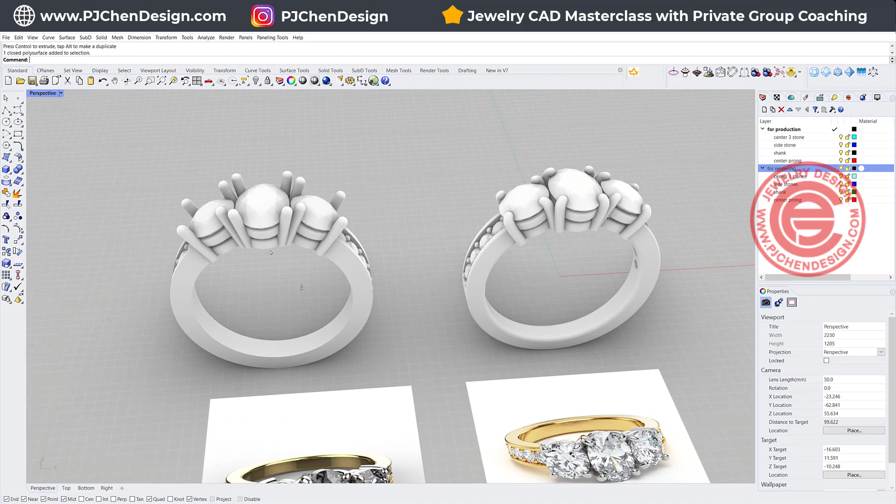I'm very excited to collaborate with another YouTuber, Will Gibbons. His channel is all about Keyshot rendering. So in this tutorial, I'm going to talk about how to prepare a jewelry for the production compared to the jewelry for rendering like the one on the right. If you go through my Keyshot rendering playlist, you can easily create a rendering something like that.

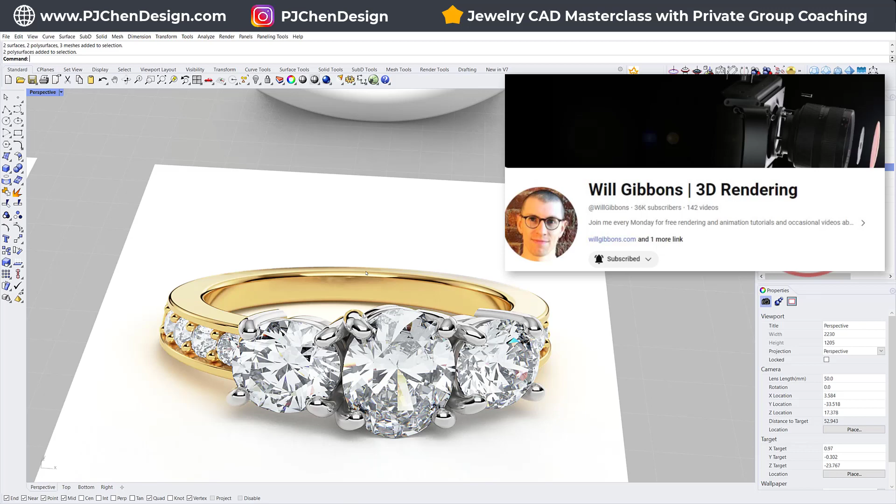But on part 2 of the video, Will is going to talk about how to create a stunning rendering like this one with a lot of Keyshot rendering tips to make the stone brighter and also correct color on your gold, starting from scratch.

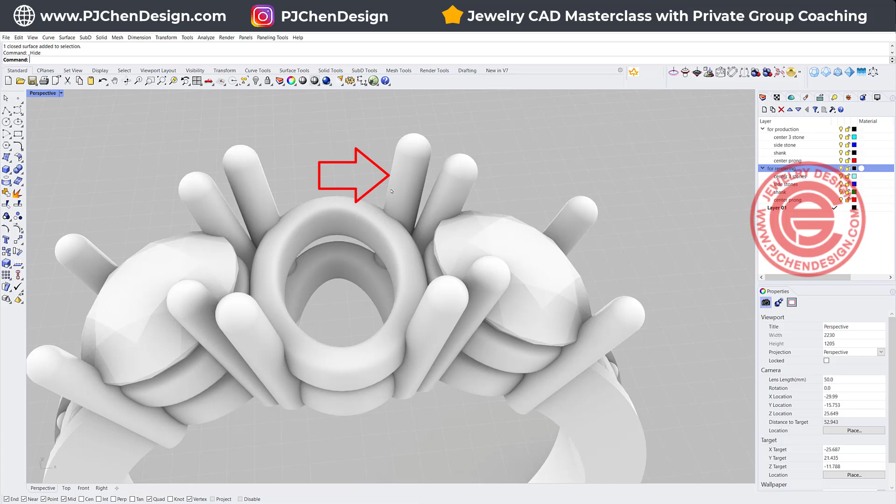As you can see, the ring on the left is more for production. The reason we are making this look like a porcupine is because we need to have it longer, so the jeweler will be able to bend the prong over. Another thing, we don't want to pre-cut the prong, because we want the jeweler able to cut and polish at the same time, and then when you set the stone, it won't be dark on those four corners. Right? So that is a big difference.

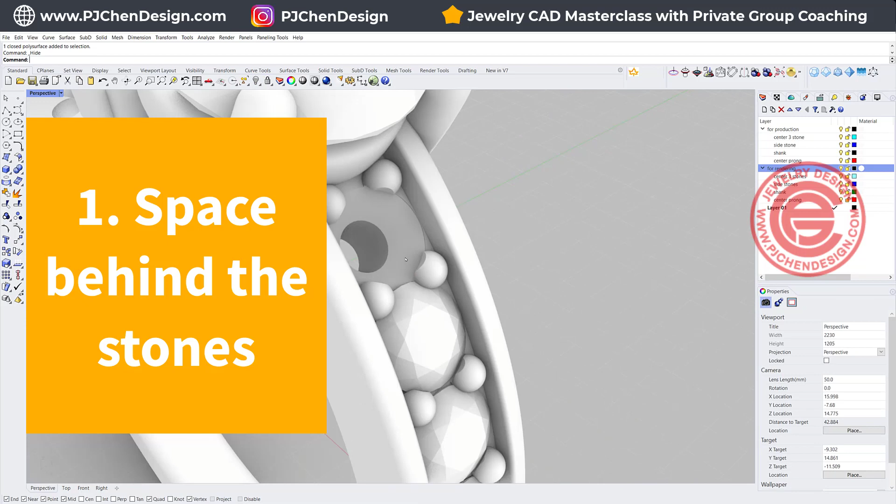When we are doing the jewelry for the rendering purpose, there are 4 things we need to pay attention to. First, you want to pre-cut the hole for each of the stones. Let me remove a stone to show you. You can see the hole is cut, the edge is beveled. If you take a look at the prong right here, it is already bent, the seat is already cut. You can even see I have a notch where the prong is bending. So the idea is there's no intersection between the stone and the metal part.

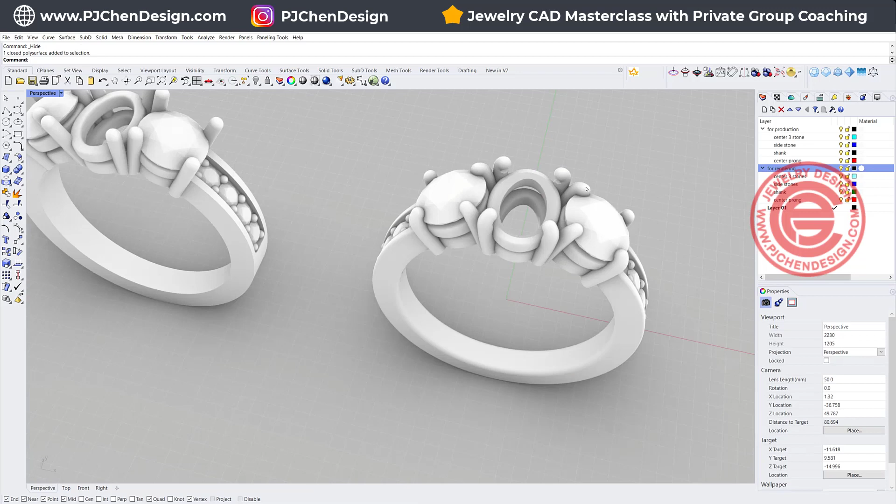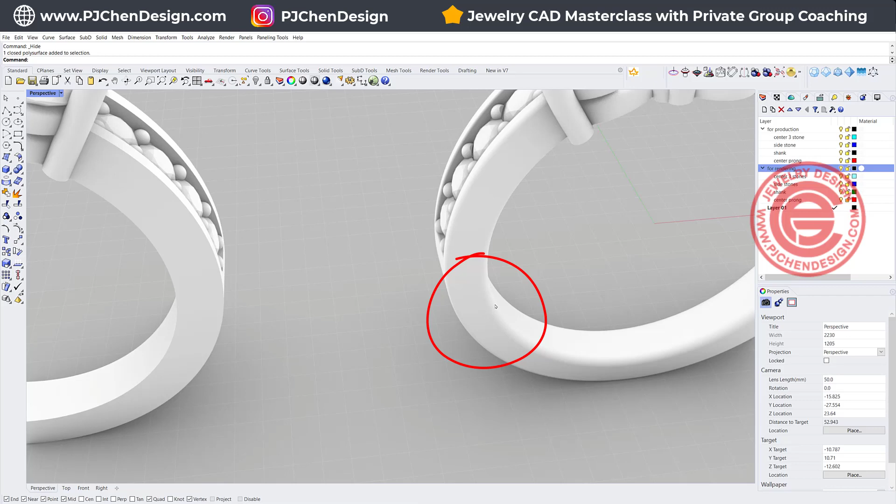The second thing is you definitely need to bend your prong. You don't want it to look like a porcupine right here, because the customer wants to see the finished look. The third important thing is try to fillet all the edges as possible. If you have something like this, the rendering surface will look super flat. Compared with this one, any filleted edge will create better light. And then at the end, for the Keyshot rendering, we want to export it into an STP or STEP file.

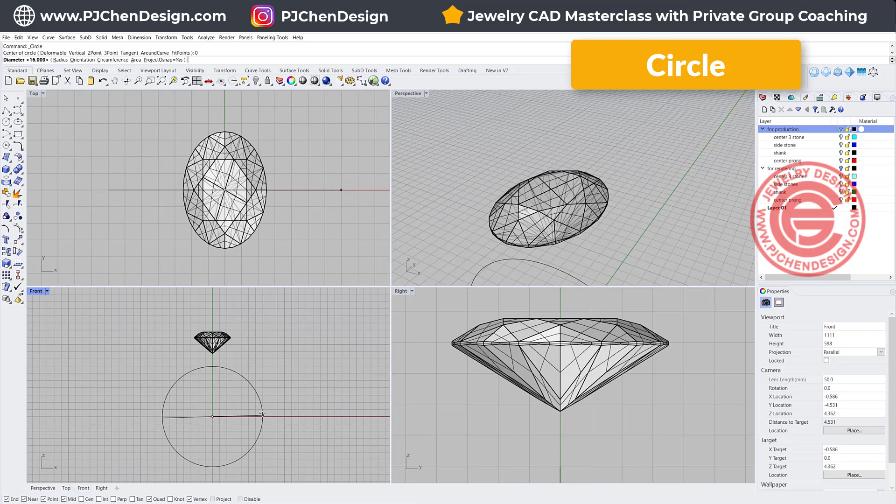We are going to start with a 7x5 stone, and you can download the stone file in the description below. It will be a round file and you just need to 1D scale. Now to create a setting for this, we need to decide where our ring is going to be. Using the circle command, we are going to create the circle for whatever ring size. In my demonstration, I'm going to use 16mm. So that is about the size.

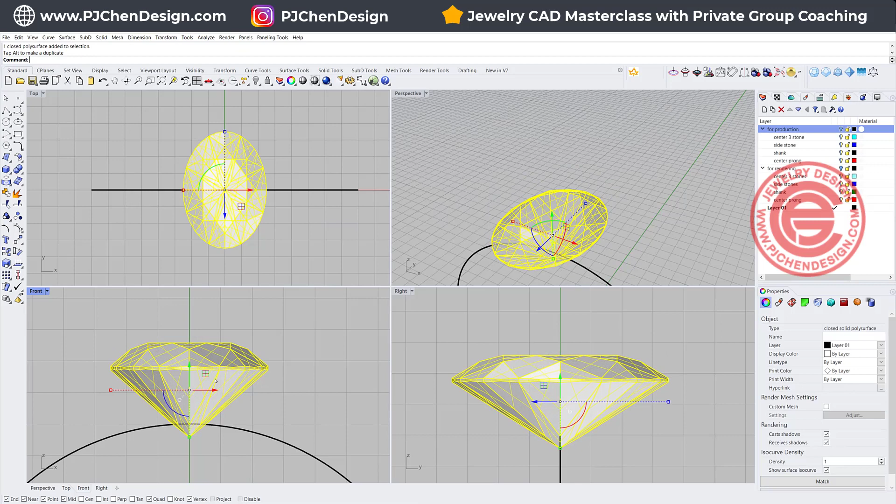The bottom point of the stone we call the culet. Make sure that your culet is not too close to the ring rail. You want to keep it at least 0.5mm there, so that way when the stone is set, it's not sticking out like this. If it does, diamond is pretty hard and will definitely scratch your customer's finger, so don't do that.

Alright, so next we are going to create 2 rails, starting with the ellipse command. I'm going to snap to the quadrant right here, and I'm going to type 2.5 because our stone is 7x5. So one side is 2.5 and the other is 3.5, which is half of the 7. And then we got this circle right here. This is just for reference.

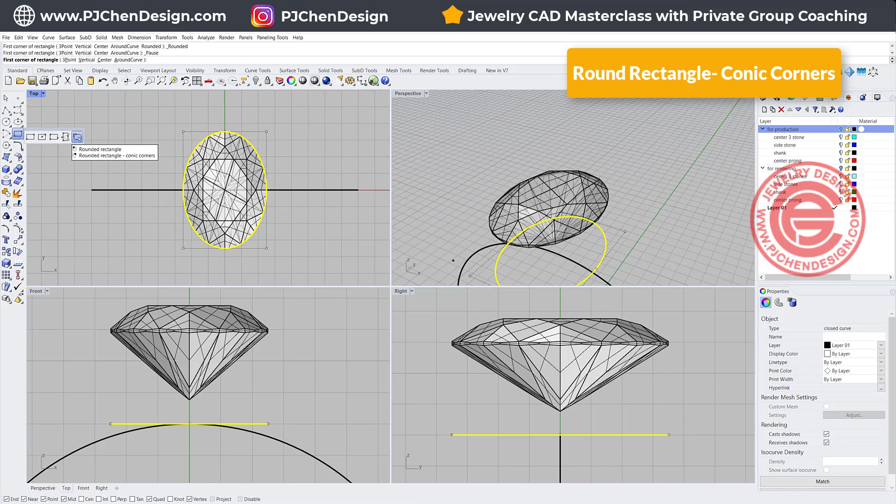Let's go ahead and create the rail shape. I like this cushion-looking thing, so I'm going to use a rectangle. Right click, you're going to get the conic corner. And we are going to draw a rectangle, roughly like that. Click one more time, and then you will get this shape right here.

So I'm going to create this shape roughly about this size. Make sure it's not sticking out past the edge of the stone, because you want to keep it unseen from the top view, so the stone will look bigger.

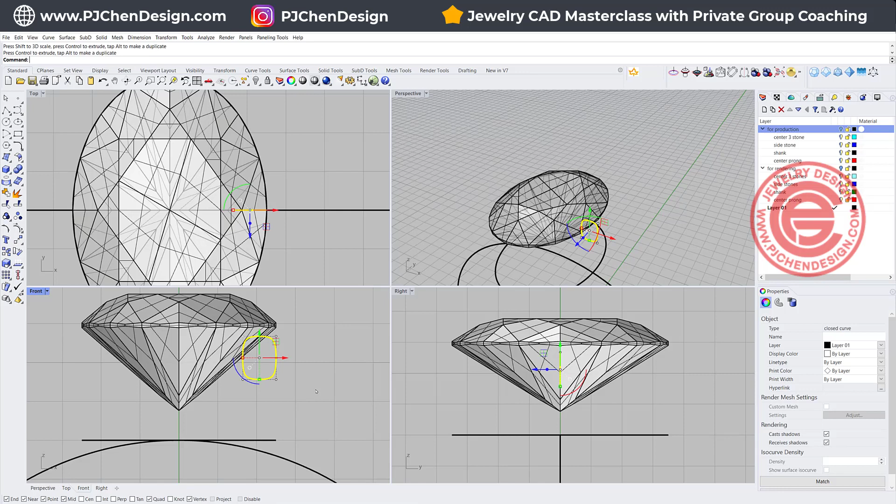I'm going to make it maybe just a little bit bigger, move it down a little bit, something like that. To create the surface, we're going to use sweep one rail. This is the rail, this is your cross section, and then we'll get that first rail there. I like to record history just in case, after that, visually, if it is too big, I can always change it, make it thinner, and the history will follow.

For the second one, we want the rail to follow the circle, so we are going to use the command right here, curve from two views, and we are going to click on this one, and really quickly I'm going to turn this one into the red color so it's easier for you to see. Now you see this one is going to be our rail, and I'm going to make a copy of this one right here. And for this rail, maybe come down a little bit so you can trim the bottom to be nice and flush.

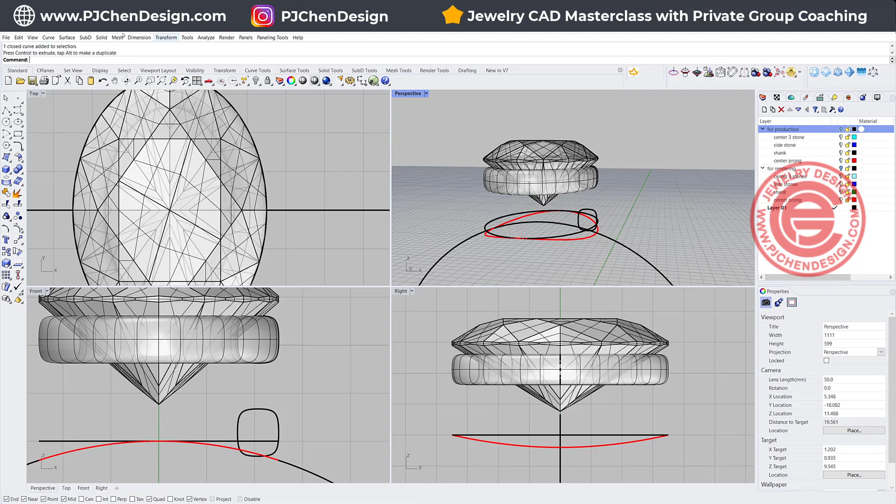What we want to do is use the same sweep one rail, and this is the rail, this is the cross section, and then we will get this one. As you can see, that will follow the ring rail much better, and let's click OK. Alright, so you got that first one, and now we need to have a full prong.

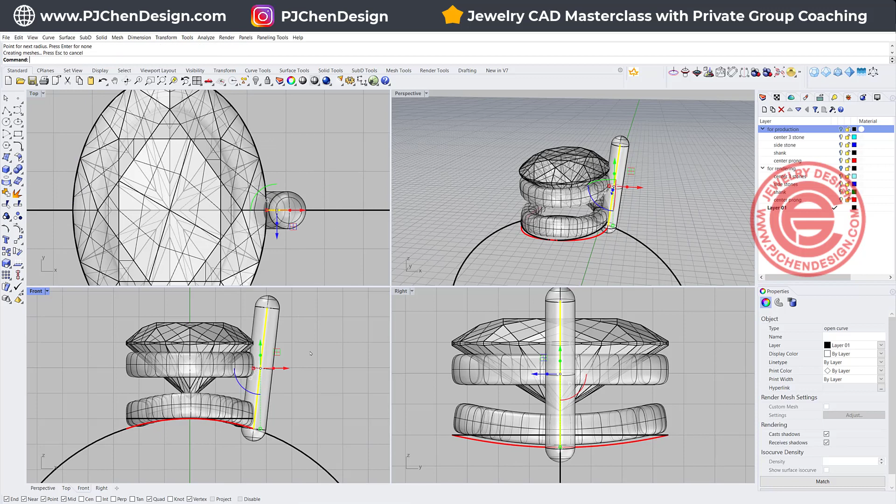Basically, when you are doing the prong for production, you can just go ahead and do the straight line, and they will be pretty much like this. All you have to do is just pipe it to the certain size that you want, right? And that will be the prong for it. However, when we are doing it for rendering purposes, you don't want to do that.

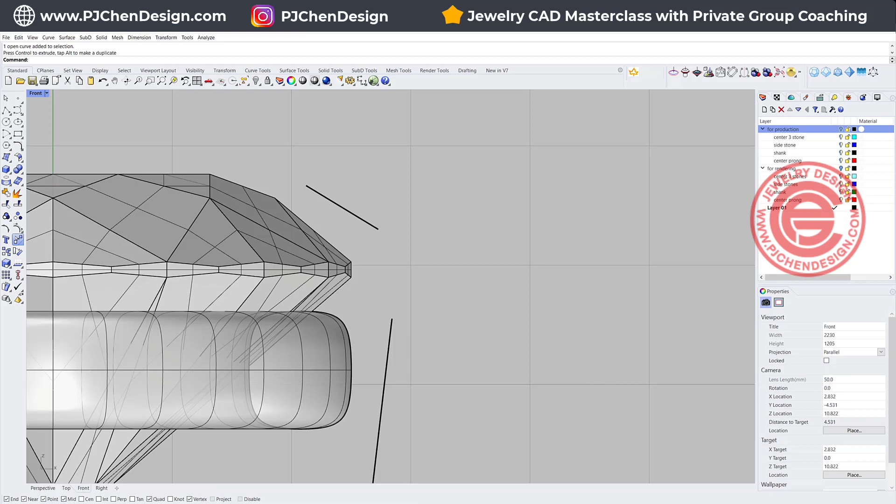The way you are going to do it is make the prong a little bit shorter, roughly about here. Okay, and then the second thing you want to do is draw a tiny tag, and that is happening somewhere there. All right, so then I have this one going up like this, and to connect in between, we are going to use the blend tool, and we are going to blend between here and here. So instead of having the prong go straight, it looks like when it is finished. Let's go ahead and join this.

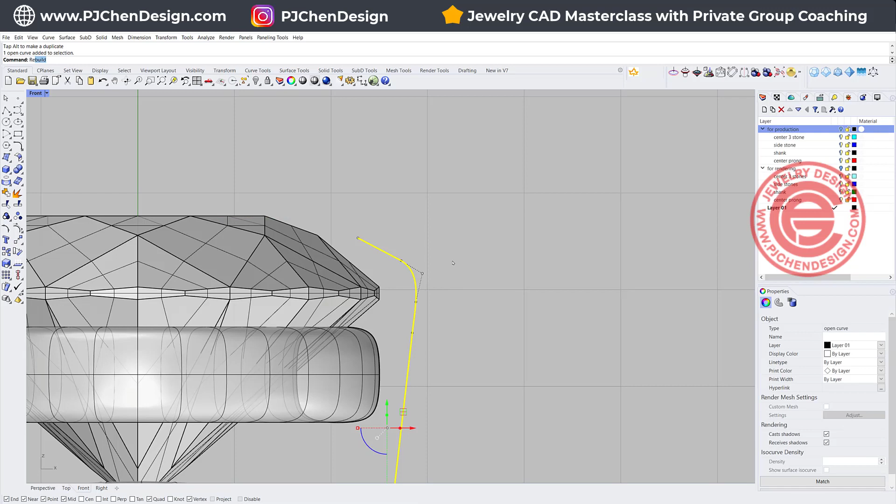Now the key for the prong, you do not want to have this prong so long like that. You probably want to have it somewhere around half of your prong, right? And then once you have that, I also like to rebuild them. You don't need to have a lot of points, but you want to have enough that it looks smooth. It was 10 here, so we just want to keep it 10 so you will get it as close as possible. All right, so now we have the prong like here.

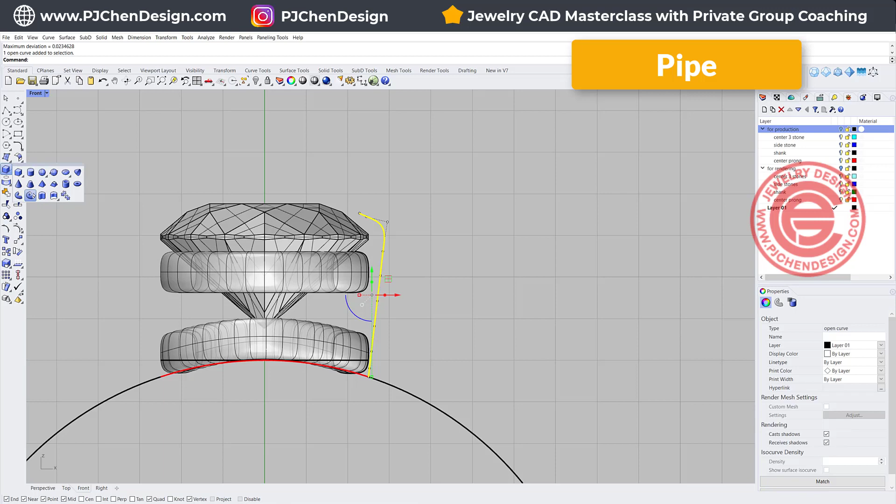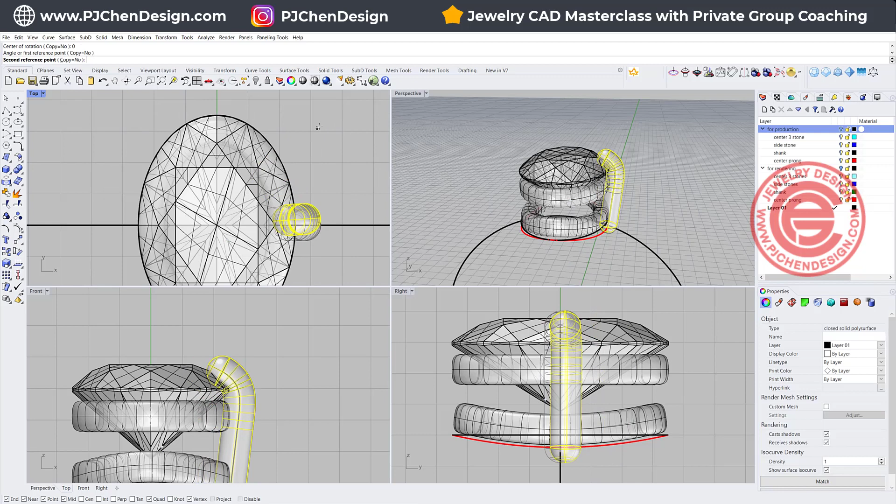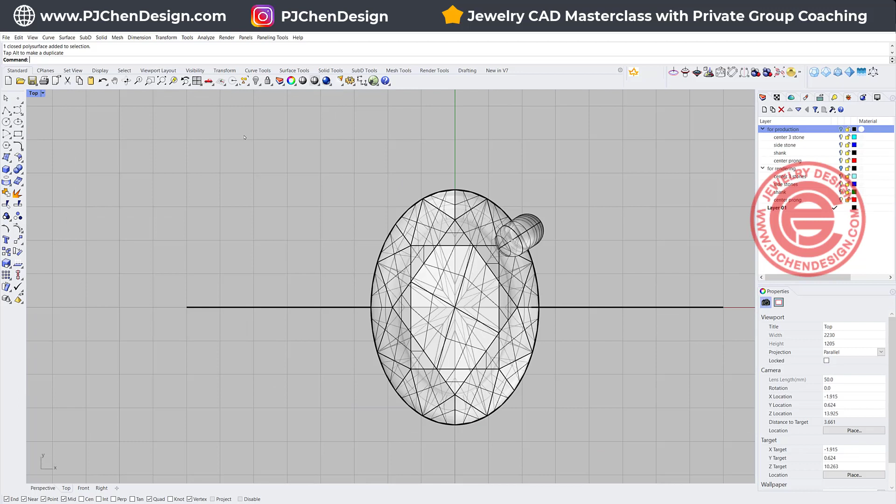Okay, so that will be one prong. Make sure they are touching really nicely and see if that is the place you want them. If you like them, let's go ahead and mirror to the other side. And we also need to mirror to the other side on this one. All right, so that will be the center stone.

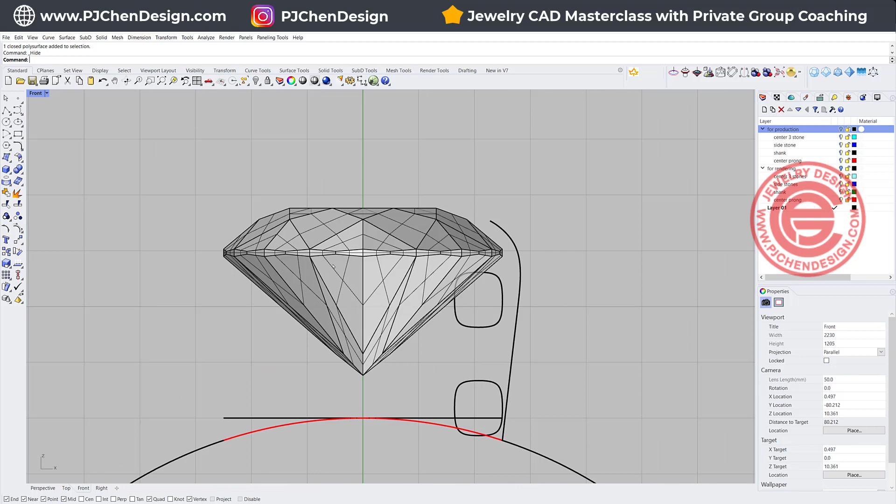Now, to make sure it has a really nice rendering, we do need to make a collar. I'm going to hide the setting I just made, and I want to show you how to make a collar. The way to make a collar is we need to draw something that looks like this, and then snap it onto the stone. If you want to follow the stone exactly, that will be fine. And we're going to get something like this and go all the way down like this.

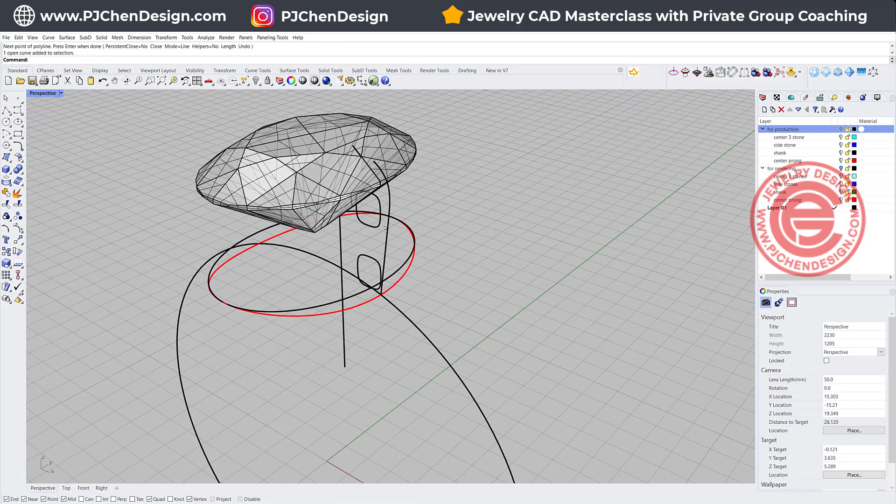For this one, we are going to create the surface, and we are going to use the command sweep one rail, and you're going to pick the rail, pick the cross section, and once you hit enter, it will look something like that. The top and the bottom are open, so use the cap command to cap it. So we'll get something like this.

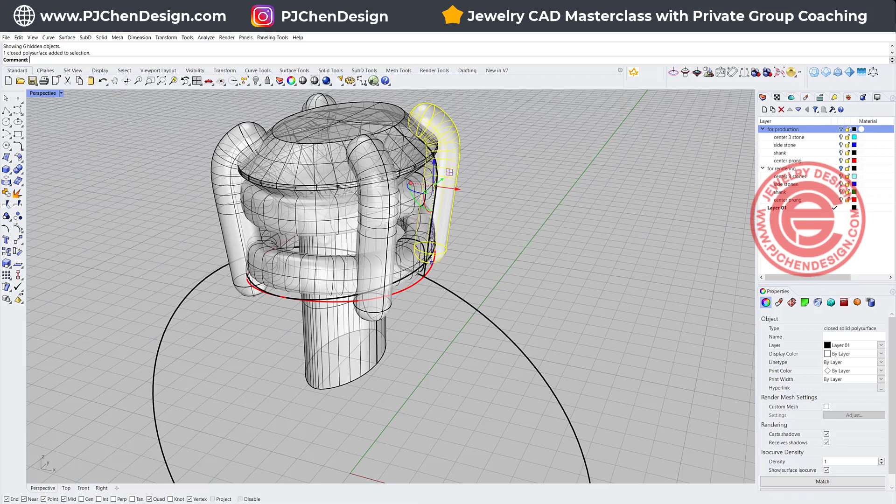Now we can turn on our setting, and first of all go ahead and boolean all the setting right there. We're going to use boolean union, and to boolean all of them together, it will say you will break the history, but since we're no longer changing it, that's fine, and then we'll have something like that. And let me change the color to red. The second thing we want to do is use boolean difference. This one will be differenced out from this one.

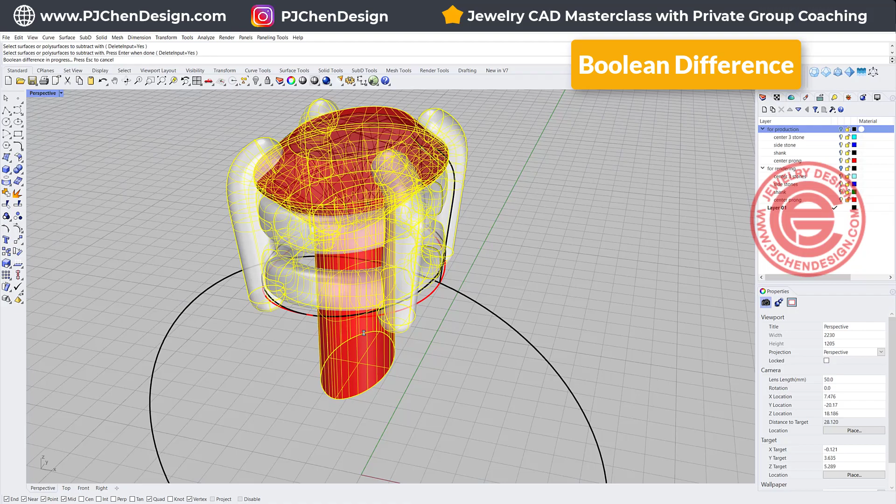So if I hide the stone, you're going to see that there's no intersection between my stone and the setting. And you can use exactly the same way to create two of the round stones, and then you create one right in the middle and just rotate it to the place you want it, mirror that one to the other side. Then you've got those 3 stone settings on the top.

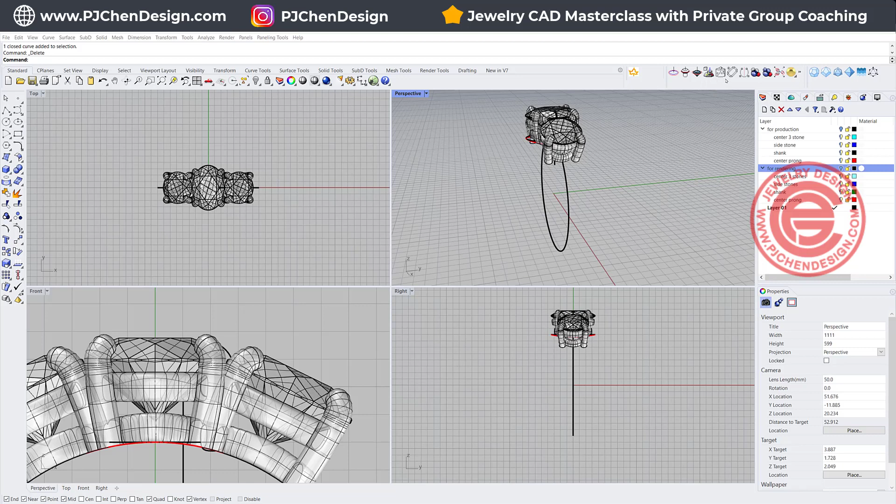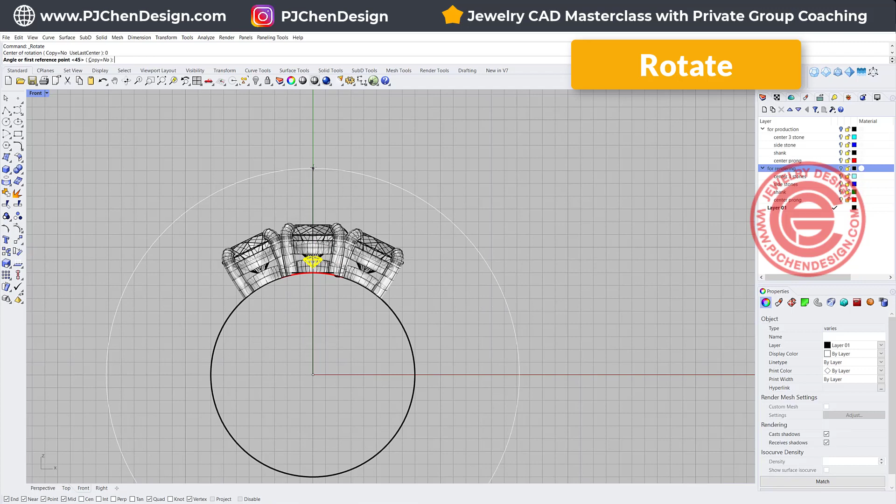Before we start making any of the stones, we need to make sure that we have the correct stone right there. This stone I have is 1.5 millimeter. I'm going to move it to the top, and then I'm going to use the rotate command to rotate the stone into the first position right there. Alright, so the stones are going to follow the circle, all the way to half of the ring shank. And again, you don't want to set it too low.

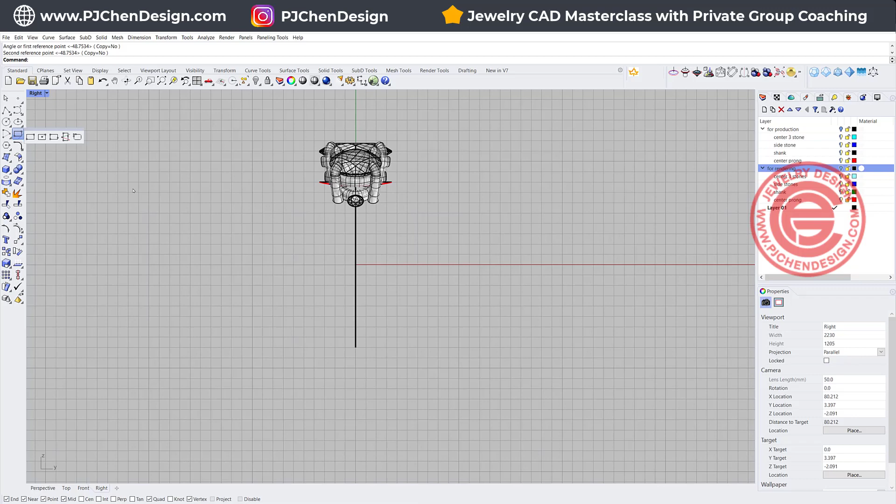So I'm going to come into my right view, and I want to set it up for my ring shank. I need to have at least 0.7 millimeter, so it should be 3.2 millimeter. And how high is it? Usually I would like to have 1.5 millimeter. And I want it more like a comfort fit, so it's going to look like this. Let me move this one here.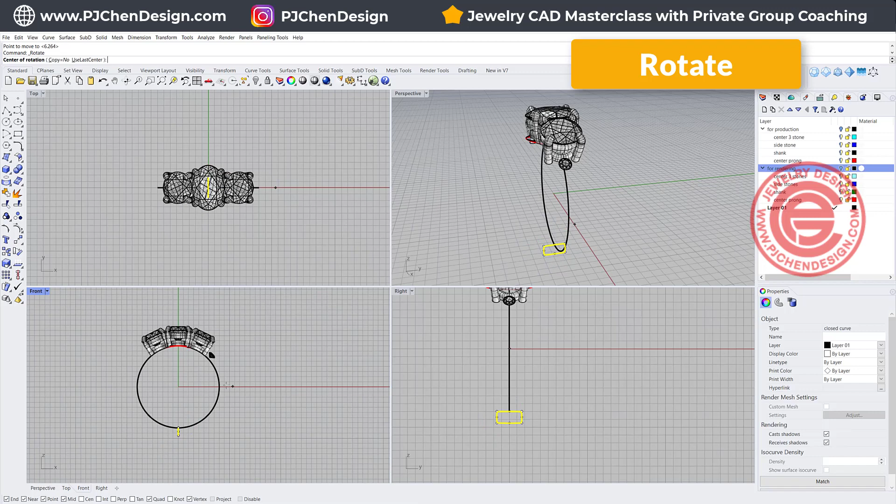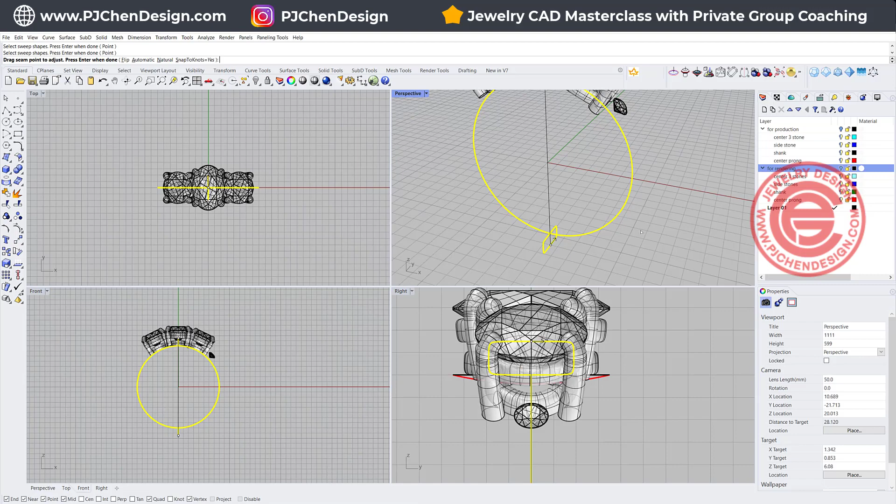You could have it tapered, so if you want it to be tapered, you could rotate just the bottom one, make sure copy equals yes, and rotate it to the top. With this one, we do not want to change the thickness, but I want it to be just slightly wider. To make the ring shank, we want to use a sweep one rail. We're going to go from here, starting from this profile into this profile. And again, I want to record history to make sure that will be correct. I also want to close the sweep, so that will be a whole ring shank.

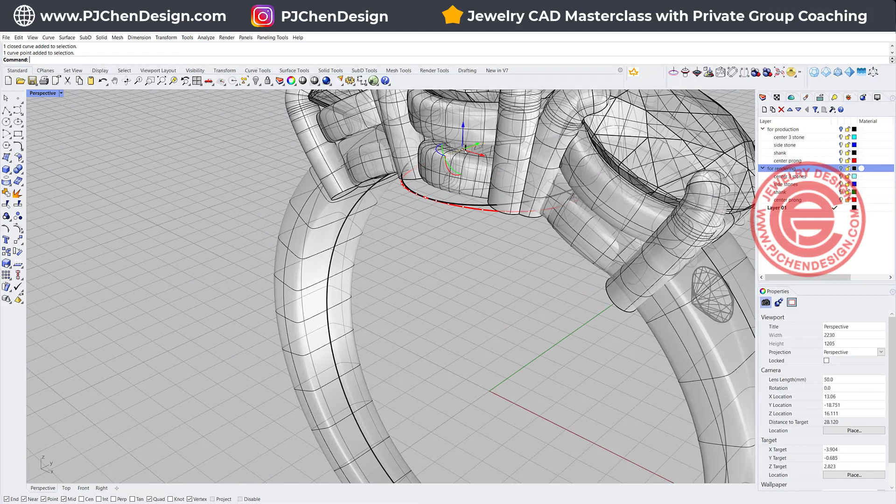Now, if you take a look, the top might be too wide. The bottom might be too wide. We actually don't need this ring to be so wide, and because we recorded history, we can tweak it there. As long as your stone has enough wall next to it, you don't need to make it so thick unless that's what you want for the look.

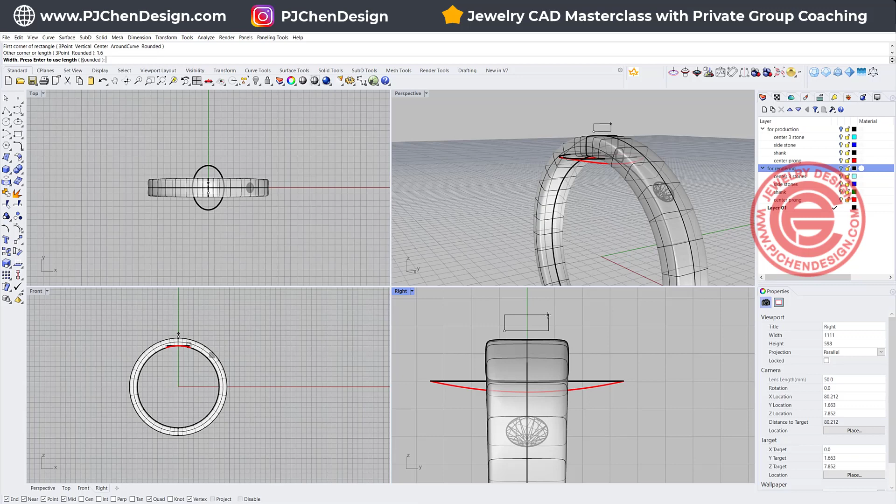Alright, once you have it, the second thing is we need to cut the channel out. I'm going to come into the top and hide all the stones, so you know exactly what I'm doing. I'm going to cut the channel out, starting with a rectangle, and we want this rectangle to be the same as our stone, maybe just a little bit bigger, so 1.6 millimeter wide. However tall it is, that's fine. Then we want to make sure it is aligned correctly, so align centers, matching the center right here, and then I'm going to move it down. This is where the stone girdle is going to be.

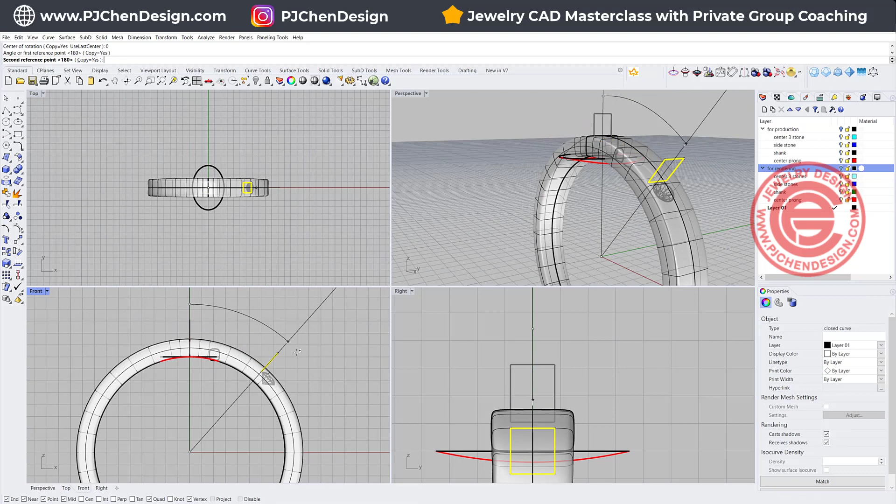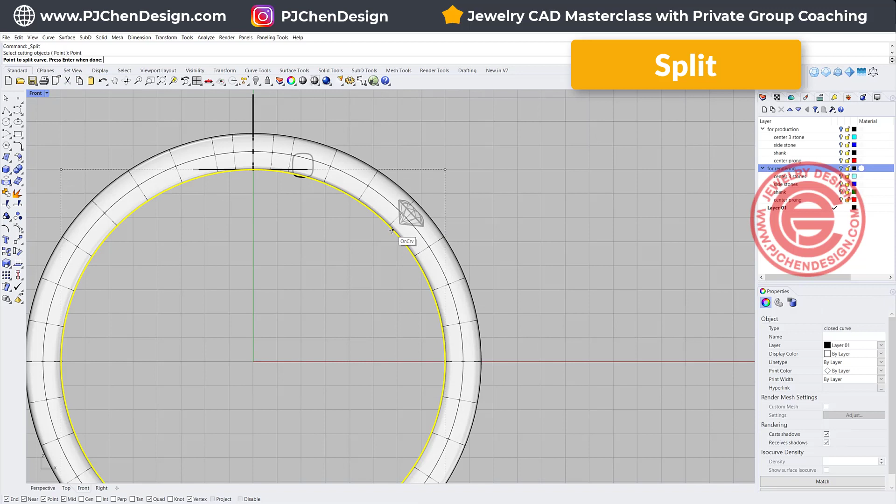Let's give it a test. We are going to make a rotation with copy equals yes, moving it into the stone to see if it is located where the girdle is, and it's getting really close. A very good guess. Alright, so now we can start arranging the stones. I'm going to have the stones follow this curve right here. I can go ahead and split with a point on my ring rail, so that will be one right here, ending at half of the ring rail. Then I'm going to turn it green. It's the section where we are going to arrange the stones.

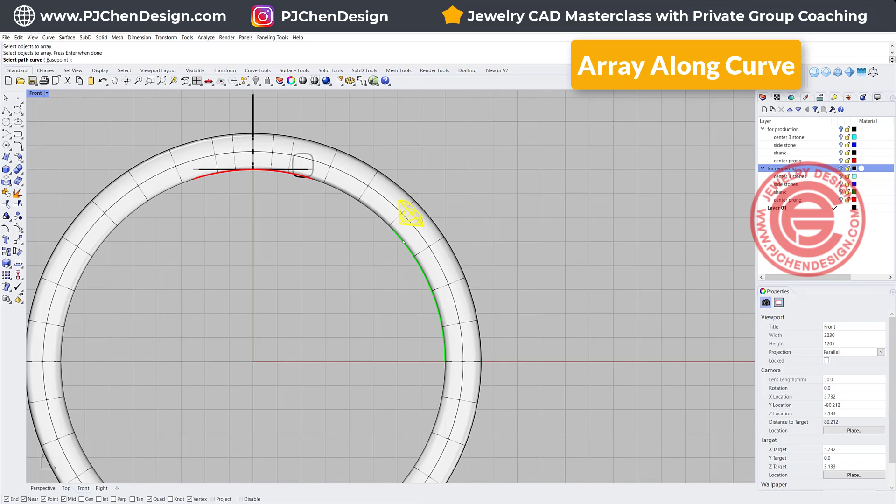Next, we want to array an object along the curve. So this object is going to array along this curve. And now you see 2 of them, right? In fact, I need to have more, so I'm just going to try 5. One thing you want to pay attention to is you want the stones as close as possible, but with a minimum 0.1 millimeter gap. So maybe I'm going to try 6, and 6 is kind of touching, so then you can use the distance instead. Currently the distance is 1.2.

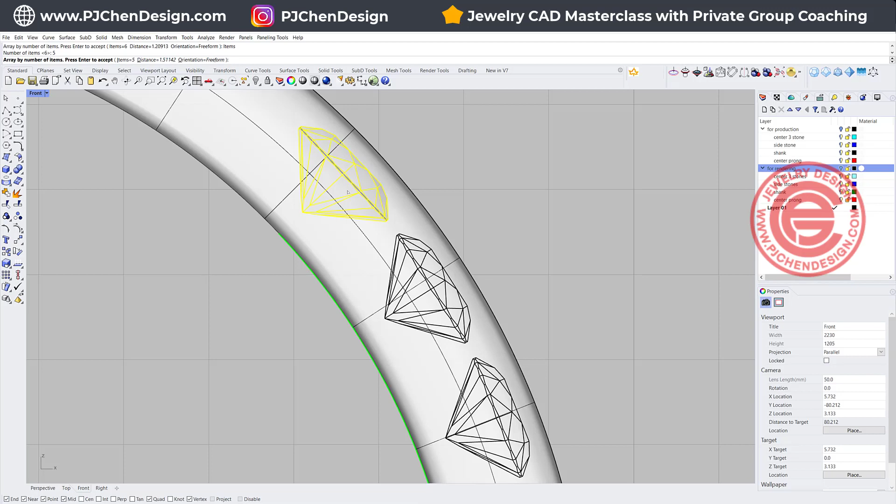If we use 5, it's going to be 1.51. All right, it's actually pretty close. Let's take a look in this view, but I personally like them close to touching, not touching. So what we can do here is shorten the distance to 1.4 and see what happens, and get it really close, and this is actually not too bad, so I'm going to keep it like that. So this is where the stones are going to be. I'm going to draw a circle one more time since that one has already been cut.

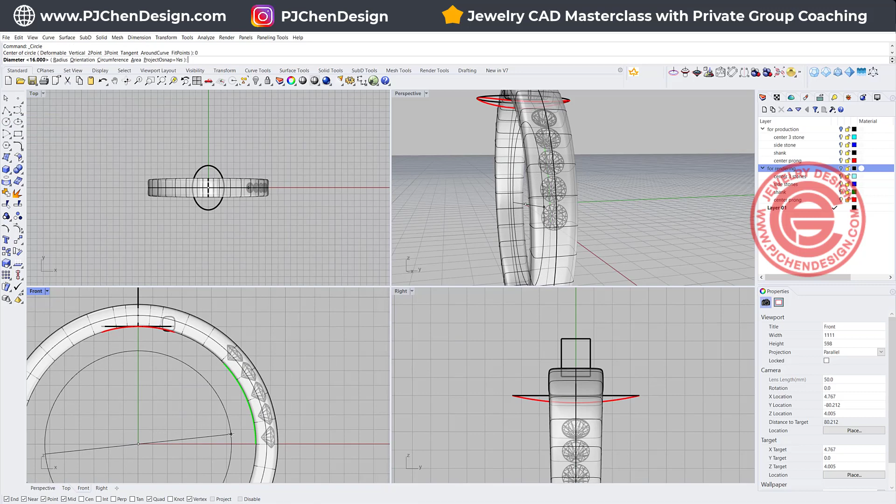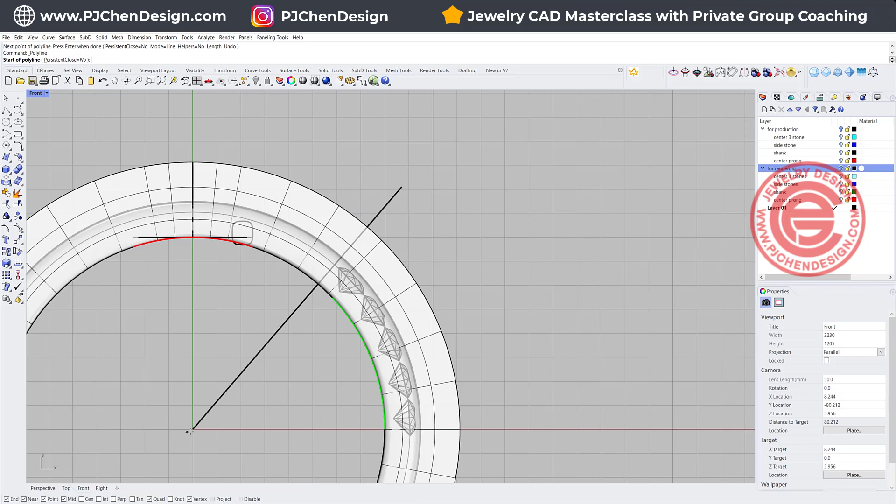So what I like to do is use the sweep one rail. This is the rail, this is the cross section, and then we're creating this piece right here. I'm going to draw a straight line going from 0 to somewhere about here, and do it again going from 0 to somewhere about here. This is going to help us trim the extra area that we don't need here and here.

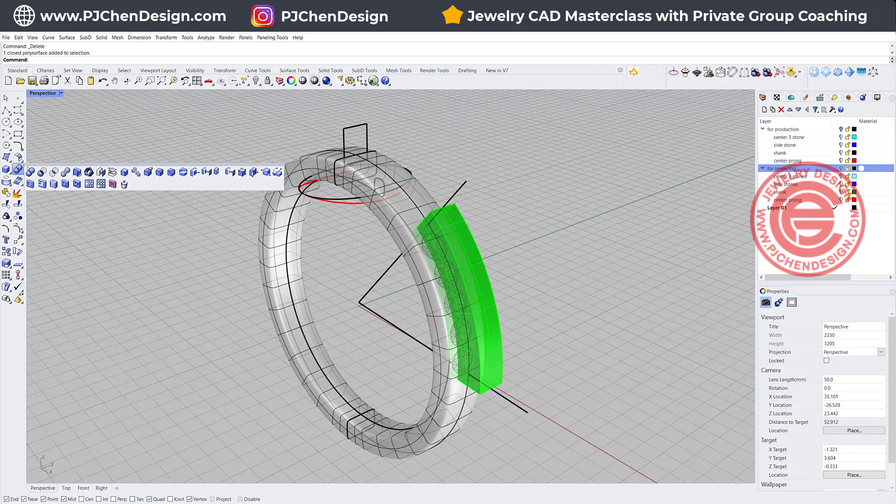All right, and then let's go ahead and cap this. I'm going to turn it into the green color so you know what is what. This green one is going to be our cutter to boolean difference out for a channel there. Now we have our stone there, and we just need to make a little prong there. Making the prong is quite easy.

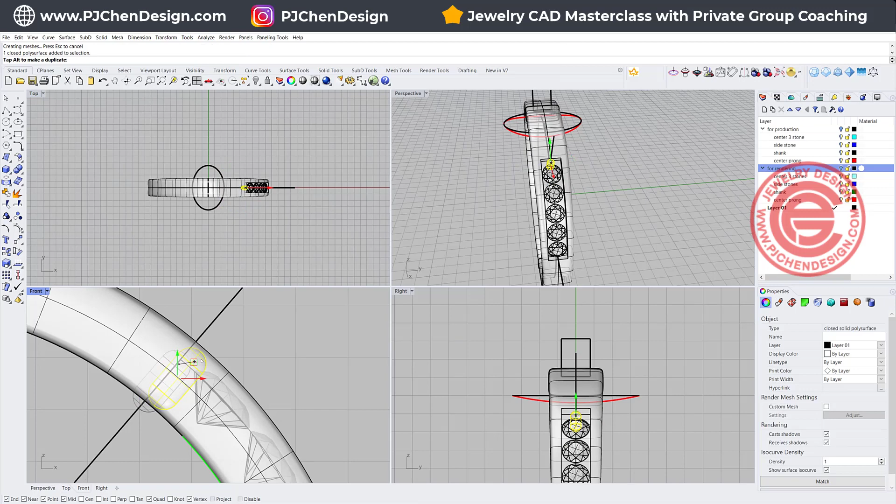We simply need to have a little straight line, and I'm basically just going to pipe it. For the radius, it's like 0.3. So then I will have that first prong. Let me move the prong into place. One thing you want to make sure is you don't want the prong actually touching the wall. It will be hard for the jeweler to set it. So you want to move it just a little bit like that.

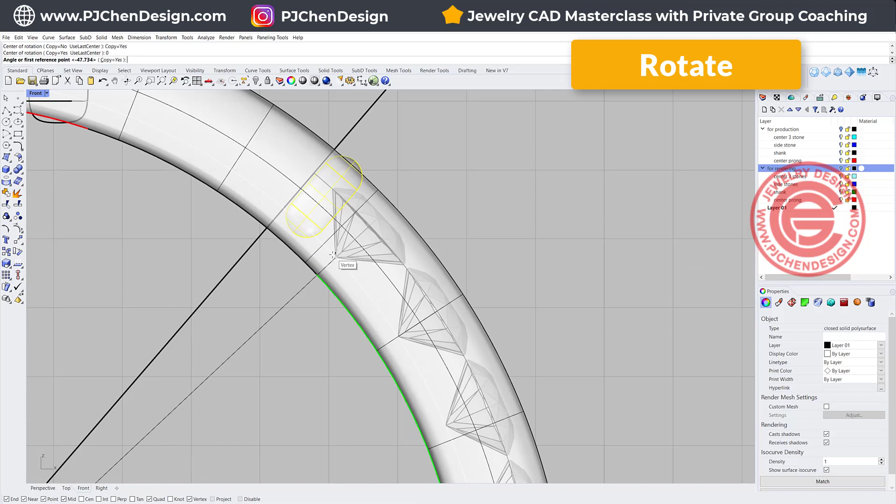And since this is only 5 stones, I'm going to use a rotate with copy equal yes. I'm going to snap onto this vertex here and give a copy like this. And the very last one, I'm just guessing here. I should have cut this one a little bit wider, but you get what I mean there. And once we are done, we can just mirror to the other side, and that will be our side stone.

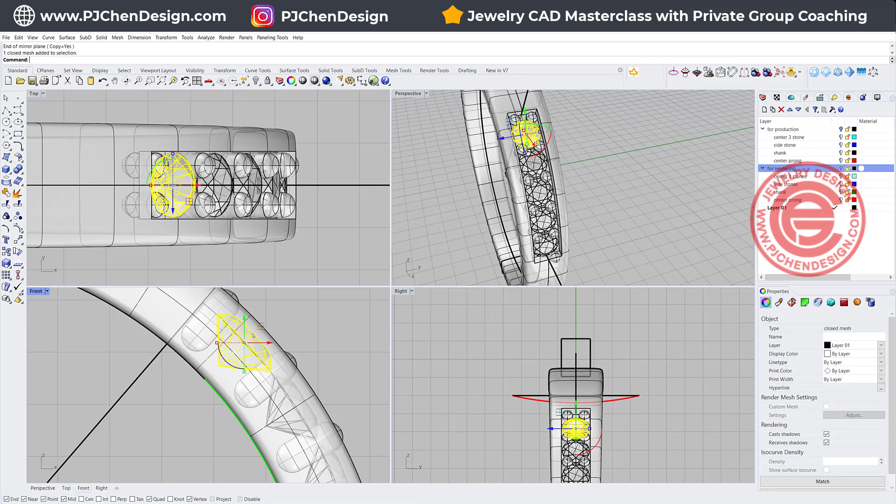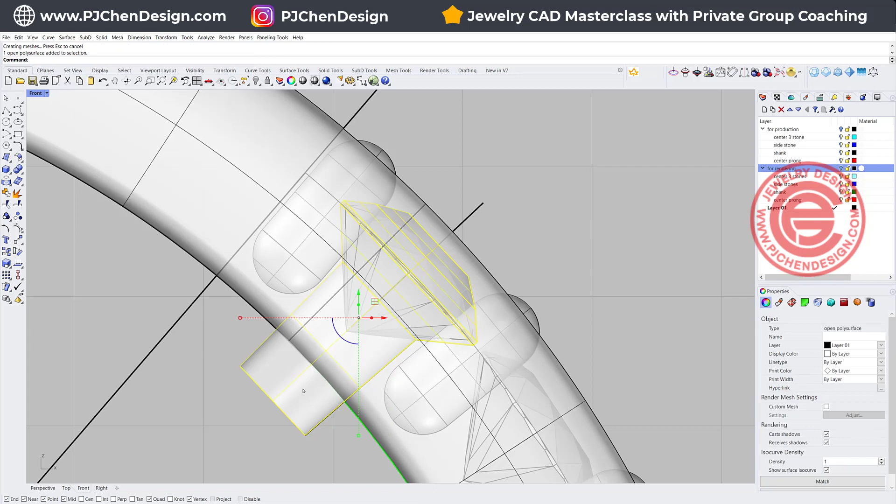One more thing that I forgot to mention is we need to have a cutter as well. So let's go ahead and make a cutter. It's going to follow the stone, something like that. And I'm going to create a straight line there as an axis. And we are going to create this one by using the revolve command, snapping onto this axis, for 360 degrees, and make sure you cap it. So then we will have this cutter right here. I'm going to mark it red so you can see it.

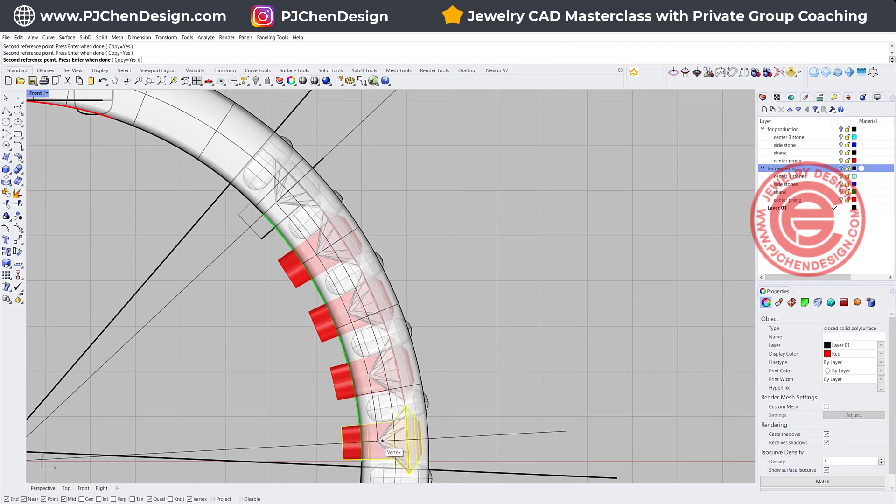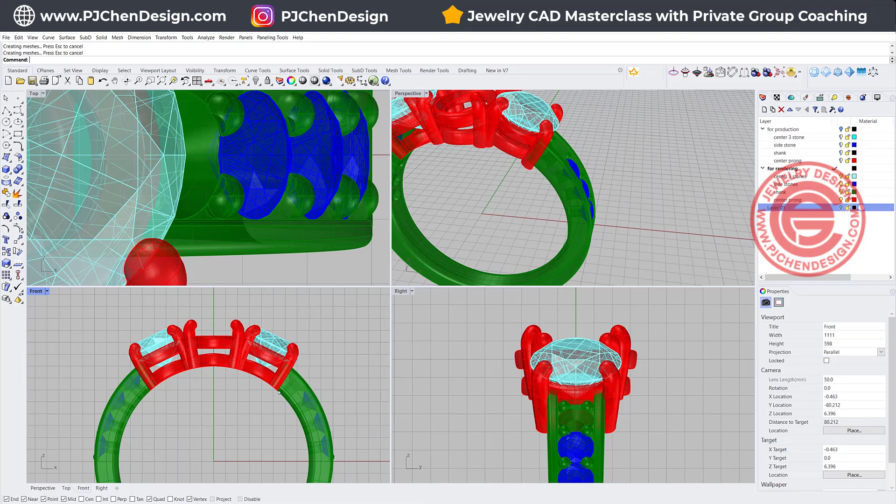And we're going to do the same thing with the rotate, with copy equal yes, and I'm going to snap onto every one of these stones on the culet. So now we have a stone cutter. We just need to have this one, and also boolean it out from the collar of 1, 2, 3, 4, 5. That way you will have a hole behind each of the stones. That's really important. And once you are done, you just need to trim the ring shank at the middle part, and we will be ready for the rendering.

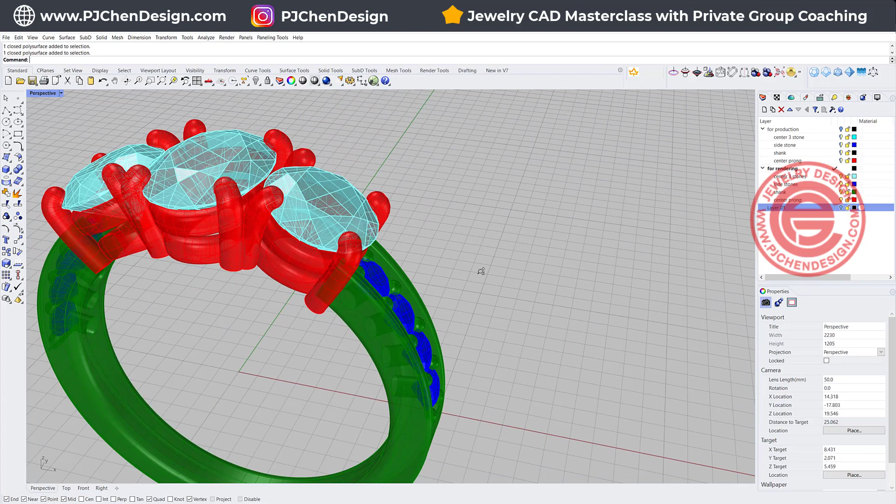For the rendering file, what you want to do is hide everything else. You're going to hide your curves. You're going to hide any of the reference images. Before you send it out for rendering, make sure you do these two things. First, you need to name your file. If they are different materials, you want to make sure they are in different layers and named correctly, so it will be easier to find them in KeyShot.

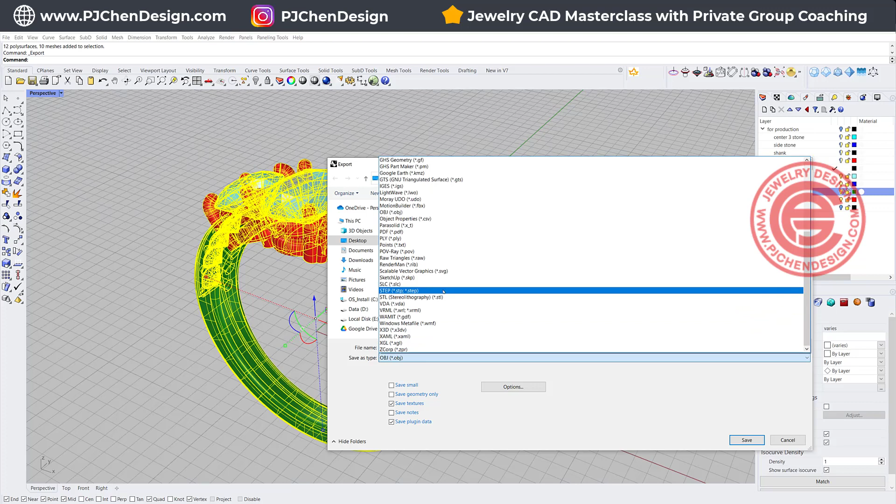Second, you want to hide everything else that is not supposed to show in KeyShot. You just want to have your model there, and then you want to select everything, go to File, and export your selection. Once you select, you are going to use STP file, or STEP, and then I'm going to name it rendering. It's going to ask you which one you want. You've got these options right here, AP203, AP214, and another AP214. Either one of the AP214 will work in KeyShot. That will keep all your layers with the correct name and the correct color in KeyShot.

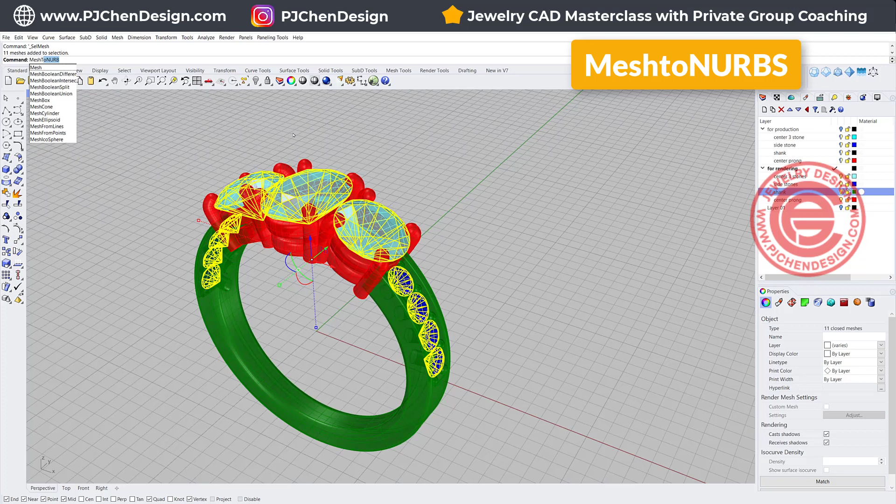So once you click OK, you might face the same problem that I have here: STP doesn't support mesh. So what you want to do is pick up all your meshes right here, and then type in MeshToNURB. So turn them into NURBS objects. Then you can hide the mesh. Now if you take a look at this one, it will be a polysurface instead of a mesh. So let's do it again. Export selection, save as rendering, pick any of the AP214 and click OK, and it will be done.

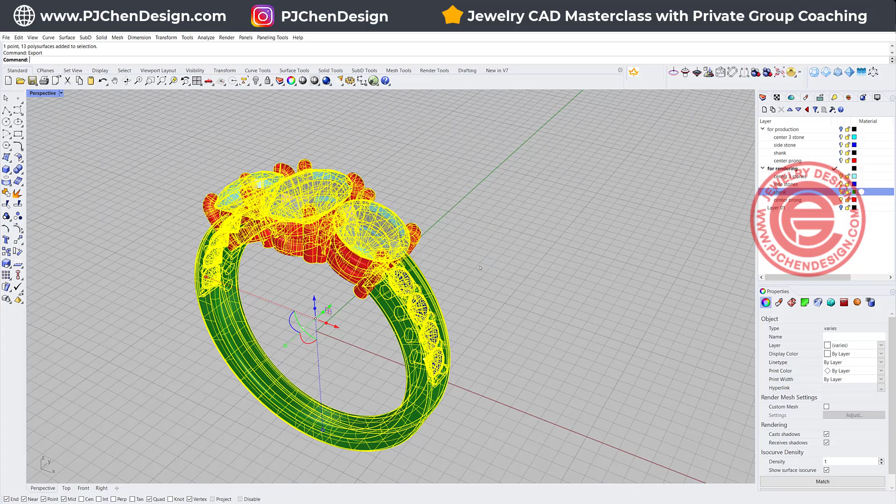I hope you enjoyed today's video on the difference between the production and the rendering jewelry model.